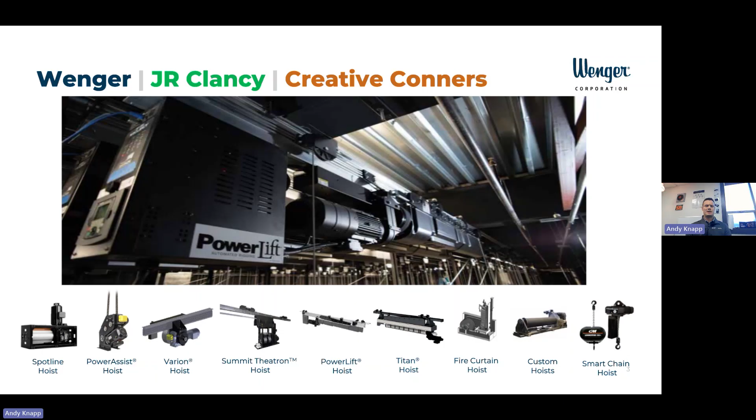All right, so we are going to be talking about hoists. On the bottom, you can see just the slew of package hoists that we offer. We're going to dive right in. So it makes sense to start with what is a hoist anyways, right? So typically in the most simple of fashions, a hoist is something that lifts things up and puts things down, right? And it typically comprises a frame that holds a motor with a gearbox that is usually coupled to a drum, and then usually there's a brake in there as well.

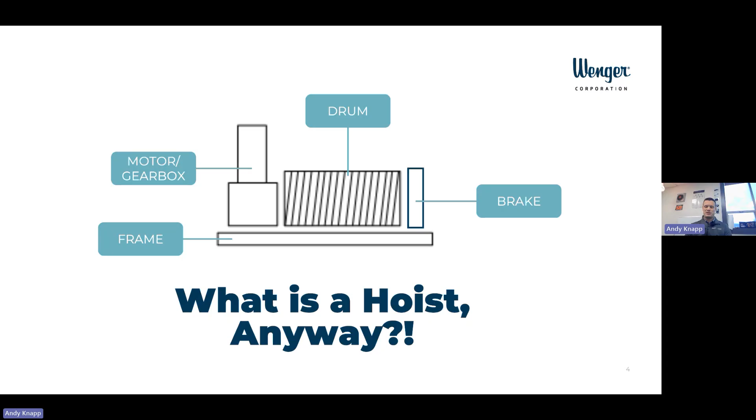Now, for theatrical applications, we typically put a little bit more in there and have additional hoist features. Specifically, we have limit switches that make it so that the hoist does not run into any end of travel obstructions like a grid or the hoist itself, and it doesn't, if it is lifting a batten, land that batten on the stage deck and just unspool all the cable.

As part of industry standard in design, ANSI E1.6-1, I believe. Pete can correct me if I'm wrong. The part of that standard in which we design hoists requires there to be a secondary brake. More often than not, that is right on the end of the drum, load side brake, and then the primary brake would be in the gear motor itself.

Sometimes there's a load cell, usually or sometimes affixed to a torque arm. Really, the load cell is just measuring how much load is on the hoist so that it can be read out on the control system. So very helpful to know what your capacity of your hoist is and how much the control system is saying is on it, so you don't exceed it. Usually there's also additional things in place within your control system which would allow for you not to exceed those capacities anyways. So, but very helpful.

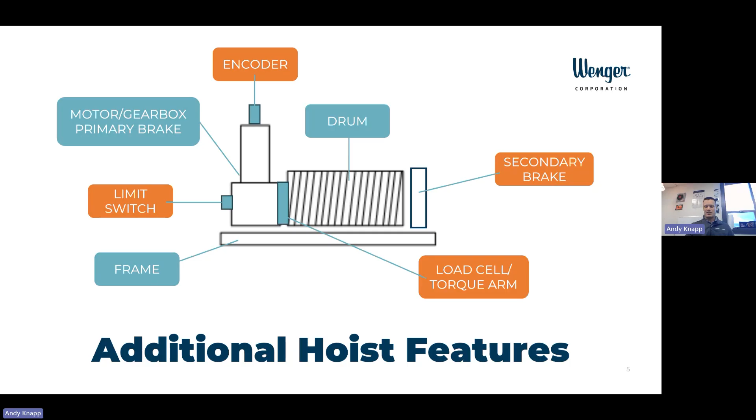So what we're looking at here is a drum hoist, okay? One of the most basic of hoists. It's what we started utilizing back in the 50s. Damon can correct me if I'm wrong there, but what we used to do in designing for these theatrical systems is just put the biggest, depending on what you were lifting, right? Just a big drum and a big motor, and you would lift your battens or what have you.

The problem with a drum hoist really is they're big, right? Especially if you're spooling all that cable on one layer on the drum. If you notice from the plan view, right, these things would be taking up a lot of space. You wouldn't be able to have your battens on 8-inch centers, or 6-inch centers, right?

And there's a big issue with fleet here, right? Fleet angle is the angle at which the wire rope is spooling off the drum and hitting the loft blocks, right? If we go beyond what we're supposed to there, we're going to deal with more failures and more wear and tear on the equipment, right?

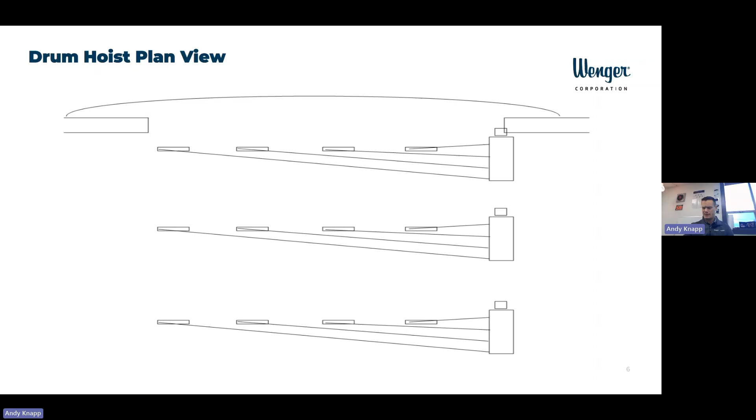So in order to combat this, we started to build what we call a line shaft. So a line shaft hoist is a lot slimmer, right? You can pack them in together, and you're able to utilize this as an option for having a more compact system. The only issue with line shaft hoists is because we're dealing with a lot more components that are spanning, say, your entire batten, it could be a little bit costly.

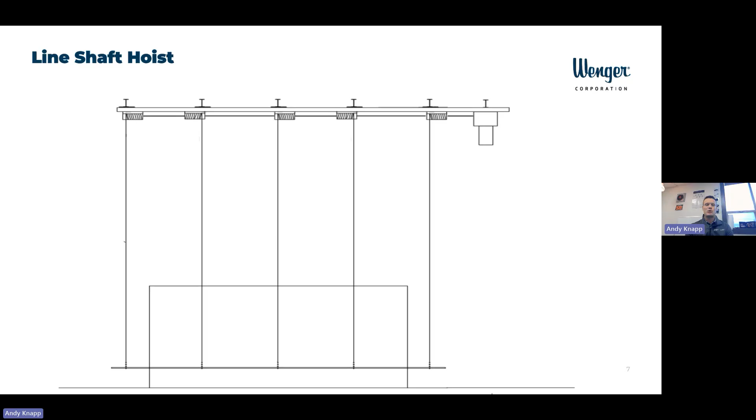So that brings us into the zero fleet hoist, right? So Powerlift is a zero fleet hoist. We'll be talking about that a little bit. You'll notice this hoist would be located off stage in the wings typically, and then it would spool the wire rope out to the loft blocks, which are a lot cheaper than drums, right? And which will then turn the cable to lift the batten, right?

What makes this zero fleet is the cable spools on the drums in a single layer. The drum itself is moving on a screw. That screw then allows for the cable to pay into the head blocks at the same place, and then it comes out of the head block at a straight line, so you don't have to worry about that issue we saw with the drum hoist, right, where that last lift line is just literally going at a crazy angle at your loft block.

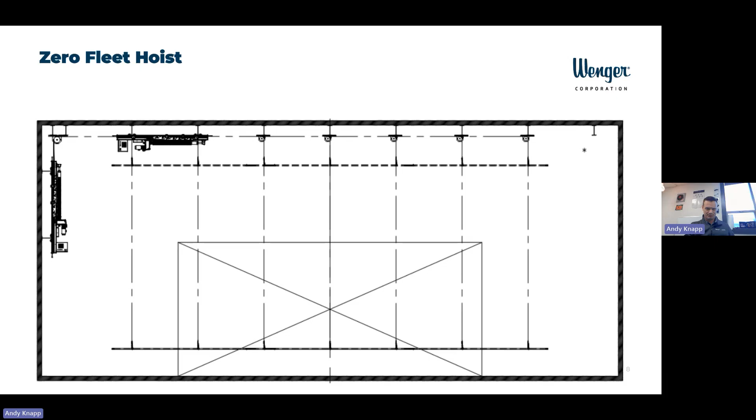Now, another option that we will be talking about a little bit are counterweight assist, right? So probably one of the more accessible and easily retrofitted hoists when you need to have some motorized equipment, right? If you have a counterweight system already, or you're planning to build one, the counterweight assist is a perfect option to get some utility and motorization within your system.

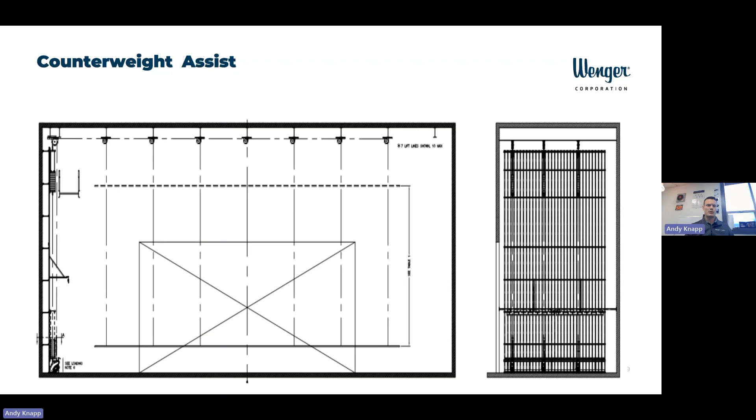So how do I pick which hoist I need, right? Well, let's start with what are you doing in your space right now, right? Are you the type of space that is going to be setting things, setting and forgetting essentially, right? Or are you looking to use your motorization for really cool advanced automation, right? So basically utility versus performance, right?

When we think about utility, we're thinking about electrics or shells. Those things don't really need to go at any fast speeds. There doesn't need to be any timing or precision. They don't really need a complicated control system if that's the case, right? Typically, your utility hoists are fixed speed, right? So we can easily bring those battens in, put the thing on it, or tilt the shell and then just bring it right back up and leave it.

If you have a main curtain, if you have some really interesting scenery that you want to go at speed and certain timings, that's when you're going more towards something that is variable speed, right? And you may have a mix and match there to allow for really cool cueing for a show. So what are you doing? What is it really going to be used for? There may be some savings that you could have, especially if you're going for fixed speed models versus variable speed. So really consider that before you go in.

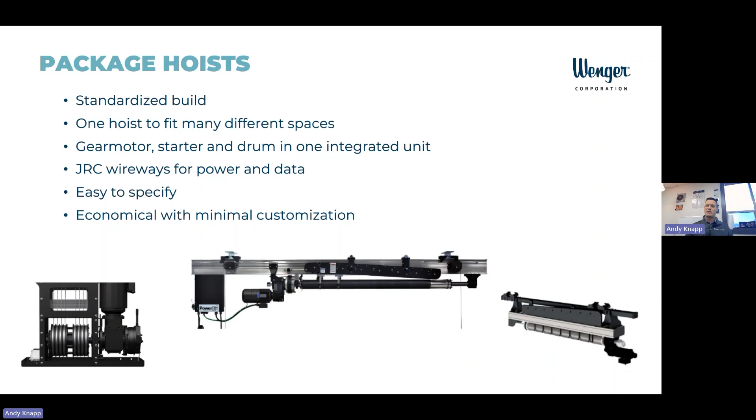Those package hoists usually have the gear motor, starter, and drum all in one integrated unit. I mean, Powerlift is a perfect example right there, front and center. For us, we typically provide it with a wireway, which is basically a very fancy means of just plugging in power and data. I mentioned that these are easy to specify if you know what you're getting, right? That's the whole point. But also, without going custom, you're able to be a little bit more economical, and you can have a little bit of minimal customization because every theater is different, so it's got to fit the majority of use cases.

So we're going to get started with the lowest level, or rather the most approachable, the easiest to add to an existing counterweight system, and that is a counterweight assist, specifically from the Clancy bit of things. We have what's called the power assist, right? This is a chain-driven hoist. It replaces the floor block in a counterweight system, and the chain then replaces the hand line.

Really, this hoist can lift only about 1,000 pounds out of balance. So more often than not, the utilization of this hoist is to throw 1,000 pounds on the arbor, so that when you are putting something on the batten, you can load it up to 2,000 pounds. 25 feet per minute, which is perfect for some basic utility sets like electrics and shells.

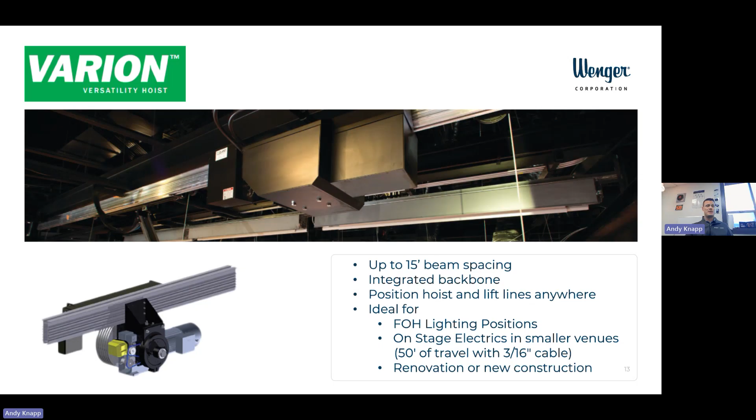Summit. Summit is our newest hoist. You'll notice first off the bat that we have a slow speed model and a high speed model. Okay, we don't have a fixed speed. Both of these models utilize VFDs, or variable frequency drives, which allows for soft starts and stops. So, for the slow speed model, we don't have to worry about damaging your really fancy and expensive lighting equipment or shells. So that makes it really nice and easy to use.

You'll notice that the slow speed comes in 230 and 480 volts, whereas the high speed model is just 480. So something to consider if you are looking at this hoist. One other great thing to see is that the high-speed model goes a lot faster than what is typically out there. Usually when you're looking at variable speed hoists by our company or competitors, you're seeing them cap out at about 180 feet per minute, at least for packaged hoist applications. For this guy, though, we are going at 205 feet per minute, which makes it a lot more useful in a performance venue, especially for a main curtain.

Easy to install. If you've been a part of our tech talks in the past, we've done a couple on this hoist. It's really cool. It comes with that backbone on top. You can install that first, then you can install basically what we call the top hat. That's where the hoist is going to go, and then you can utilize the steel backbone to lift up the hoist into place. So if you are utilizing joists, or if you have steel that's very close to your roof and you can't really get your span sets to get your chain motors in place, you can actually utilize this backbone as your strong point, which is nice.

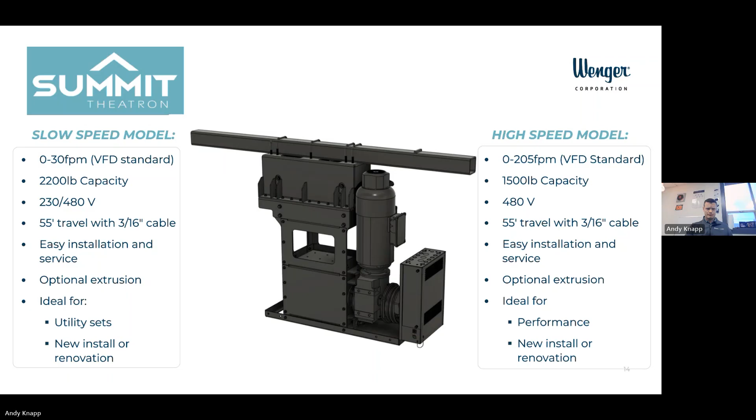All right, PowerLift, our bread and butter. So this hoist has been around forever. In fact, if I miss anything about this hoist, Pete can chime in and say it, because Pete's been at the forefront of this hoist since we brought it to market. We are on our sixth iteration of this hoist. It is a zero fleet design, as we mentioned. That single layer of cables went up to the head block, right?

There are various different voltage options. You're able for this one to drop a lift line off the front and back, which is very useful. If you have a tight space, right, a theater that doesn't have a lot of wing space, that makes it really useful, because then the hoist can actually be right over the batten. So you don't have to have that extra wing space to just shove it off to the side in order to hang your batten.

We got speeds for our variable speed version of this hoist. You can go up to 180 feet per minute. As I mentioned, some go a little bit faster. And capacities up to 2,500 pounds, which is great, because as a cost-effective package hoist, this would be the way to go, especially for some heavy shells or electrics, right? The 2,500 pounds really takes care of a lot that's out there, especially if you are in a performing arts center or in a college, right?

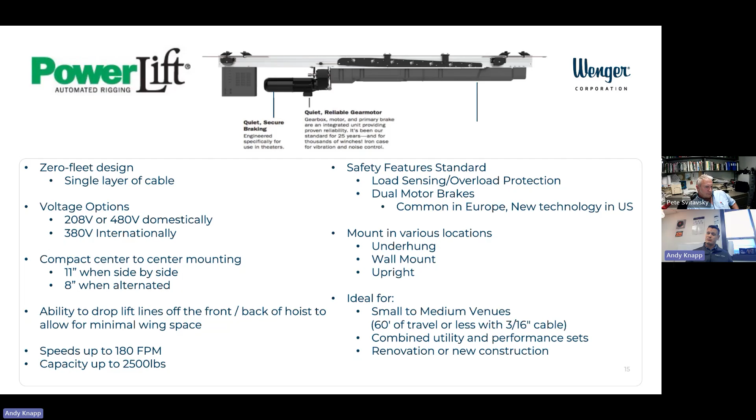All right, Titan. So Titan is another zero fleet hoist that we offer. It's capable of more capacity and faster speeds than Powerlift. As such, it's a high performance precision hoist, and it ends up being more costly in that regard. So it can do speeds up to, I believe, 650 feet. Capacity is up to 3,300 pounds.

There are actually a variety of models of this, and you can get about 90 feet of travel out of this. So this is great for a large performing arts center, for a large opera house. If you want your curtain to come screaming in, this is the hoist for you. And if you have, for whatever reason, one of those spaces that has shells that are above that 2,500-pound capacity that Powerlift can handle, and you need to go a little bit heavier, then Titan is the way to go.

One thing to point out, Titan does not come with an integrated backbone, so just something you should consider. But at the capacities and speeds that it's running at, I would hope that you would have adequate steel to mount this particular hoist.

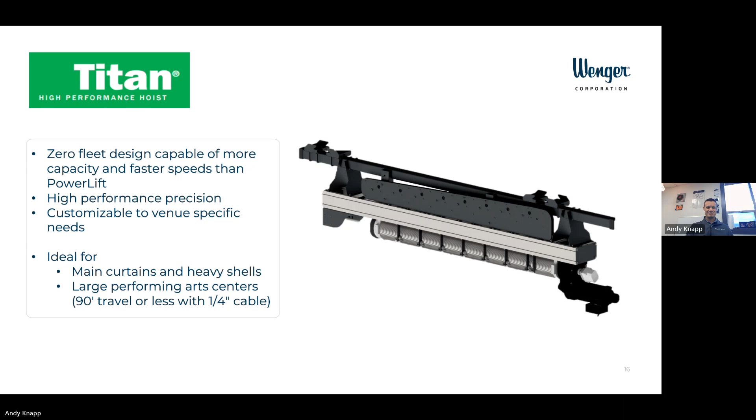Power line. Yep. So we did talk a bit about, or rather, I pointed out what a line shaft hoist is essentially, right? Technically, power line is our packaged hoist of a line shaft, but it does come in thousands of configurations, right? As many drums as you need, at different size drums, with different reevings of cables from 1/4 inch to 3/16.

This kind of hoist is really ideal for another option for when your steel is not sufficient for horizontal loads, but also if you have a weird construction in your space. Maybe most theaters wouldn't experience this, but maybe if you have a found space or something like that, and you had steel that was at multiple levels, maybe they're not all sitting at the same height off of the floor.

A power line or line shaft hoist might be the way to go there, because the drive shafts can then go and meet the drums and allow for a hoist that would be utilized in that kind of space. So ideal for acoustic shells and fire curtains. Again, this is a customizable packaged hoist.

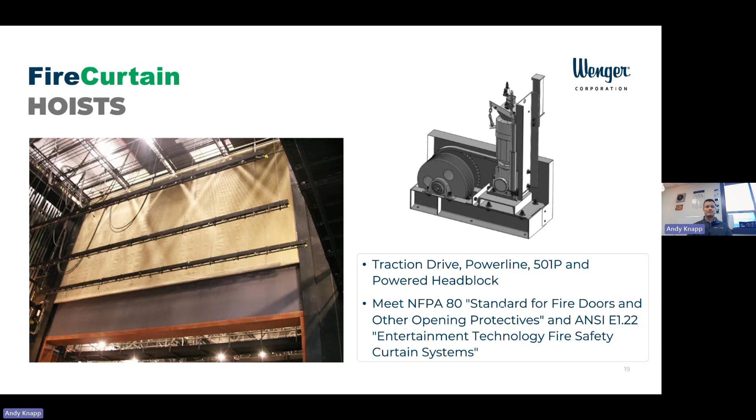So I'm going to touch in a little bit about some hoists that we offer from our Cranston site, the Creative Conners folks. There are some hoists that they offer. Again, hoists are for picking things up, putting them down. So when you talk about a winch, usually what that means is a machine that is pushing and pulling. We can get into semantics, but that's usually the case.

So for the Creative Conners offerings, I will rather be talking about hoists specifically, though they do offer a variety of winches, like deck winches, like the push stick. But we're going to start with the Spotline. I've only put three versions that I thought would be good to talk about today. There is a fourth version that if you're interested in looking at it on the website, you can.

There's a Spotline Acro that is specific to performer flying. The machine allows for that and is designed for that, but it is important to say if you are going to fly a performer, you need to make sure that you are trained by a professional and that you have the appropriate control system that would allow for the safety of that flight. All right, Spotline.

We're on our second version of this particular hoist. It's called Spotline because it essentially does create a spotline, a single pick point hoist, or if you wanted to put two lift lines on this, or if you wanted to put a bunch of these on one specific batten, you can do that as well.

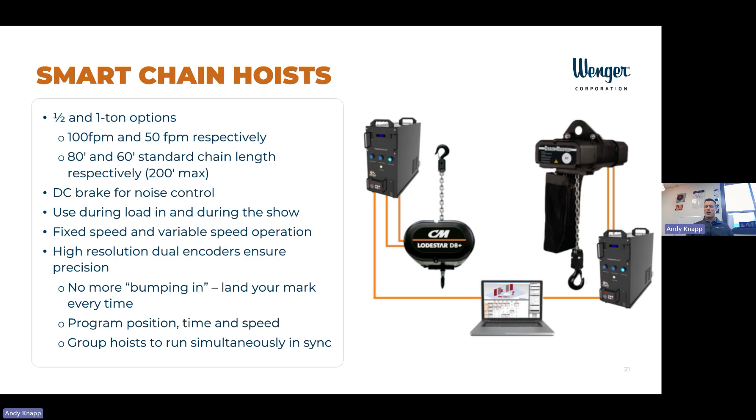And then, of course, we offer outside of package choice pretty much anything that you need. Specify it and ask for it, and we'll try to figure out how to make it.

Damon, Pete, any custom hoists that you guys want to mention, or any favorites in the back of your mind, or any capabilities that you're really jazzed about that we've done in the past? I'll let Pete go first because he's had a lot more experience, but I have one. Go ahead, Damon.

And I got a couple general comments to make after that. We have a project that we did in Carmel, Indiana, called the Palladium, I believe it is, and it had a front of house hoist, and I believe it had a 32,000 pound capacity on it, and it was just remarkable the way that the hoist was basically taken apart and taken up into the attic and then reassembled. And so pretty much, if you can think it up and you've got the wallet for it, we can do it. So that's kind of the way I look at it.